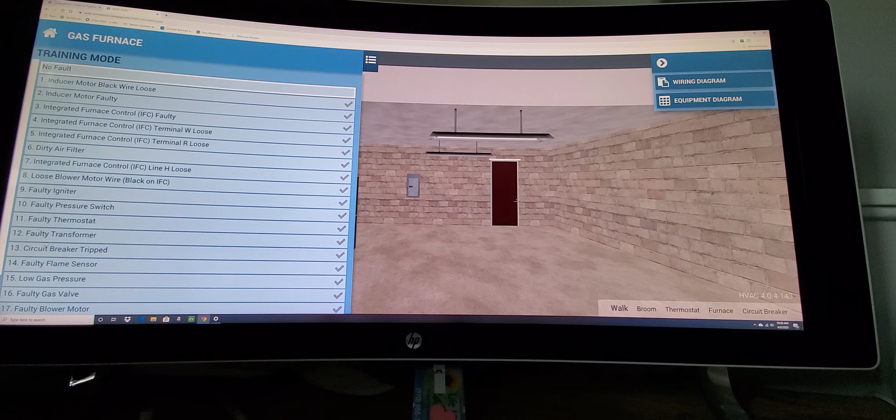There's a ton of different scenarios here, as you can see. You can go down each individual one. You can even start out with no fault, just get you familiar with the equipment. So you can come down, choose whatever one, do whatever you feel like. Let's try a faulty igniter.

So first thing first, your little cell phone here. Looks like an iPhone, I prefer Samsung. Tells you customer's name, street address, no heat call. It's gas-fired furnace without AC. This I haven't found to be useful yet. I don't know, I haven't really dug into it too far.

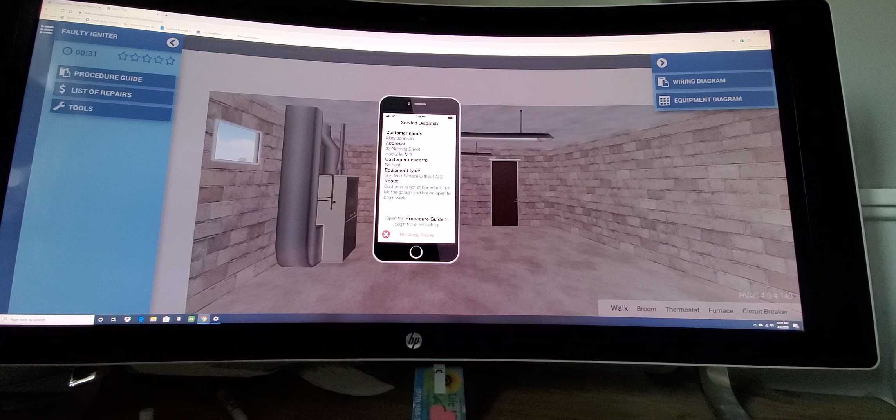So let's put away the phone. I always like to start with talking to the customer. I don't think you can do that on here, I haven't figured that part out yet. So then the next step would be look at the thermostat. Fan is on auto, the selector switch is on off. Let's flip that over here to heat.

Obviously it's on 90 degrees because we all know that everyone that's out there likes to push it up as far as it can go in the heating mode, or as down as it can go in the cooling mode, and expects that it's going to be super hot or super cold if they just keep adjusting the thermostat, and obviously that's not the case.

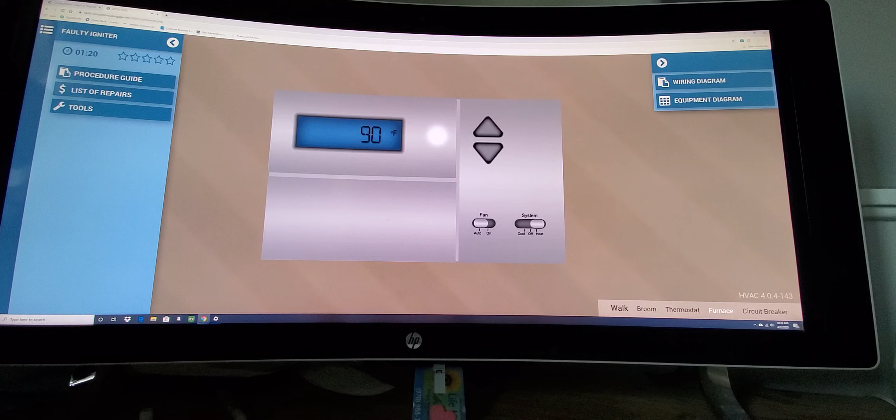So now let's go down to the furnace. You can hear the furnace working, I don't know if you can pick up the audio. So let's remove the door, you just simply click on it to remove the door. Cool part about this is it's trying to make it as close to real life furnaces as possible.

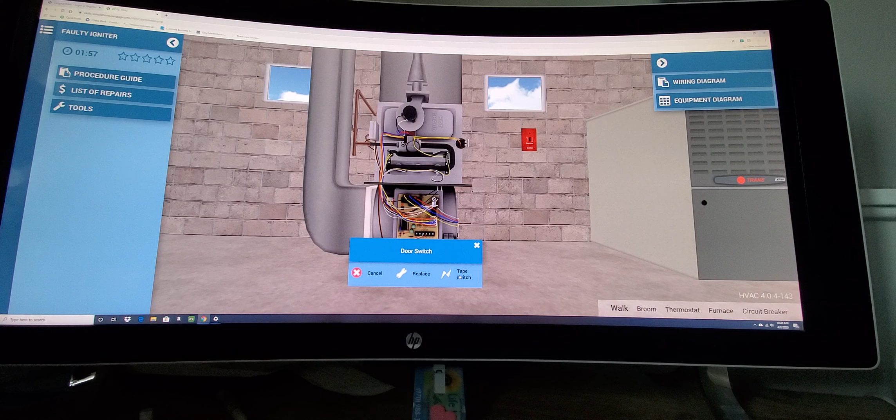So right in this area here, you see a door switch. You want to double click on that and say tape the door switch. Obviously we need to have it running. So normally you'd want to check your power and everything first, but you can see up here the blue rotating arrows, if you can't pick up the audio, is showing that the inducer motor is kicked on.

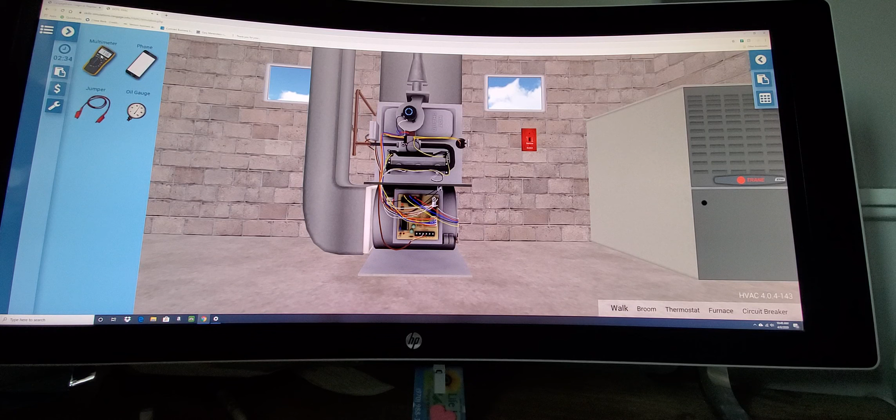So obviously that means there's a call for heat and there's no fire. So you can pull out your meter, and then of course it's a Fluke 116. If you click the red X, that puts your meter away.

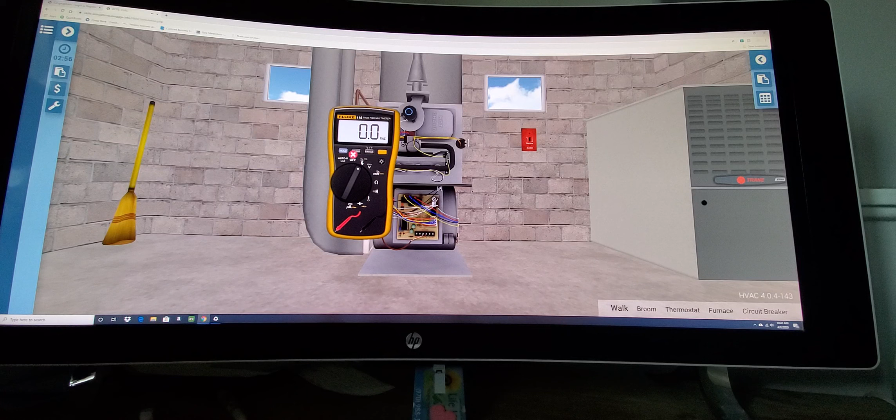You can just click on what you want to do with it, if you want to check ohms, continuity, voltage, whatever. I didn't see on this one where they have an amp clamp, but I did see that when I was playing around with the air conditioning. So in order to check voltage, you click on your red and black leads here. So let's click on the red.

Let's just, for shits and giggles, see if there is a call for heat. So we will put that on the W. Put the black on common, or red - if it's on red you should see no voltage. If it's on common you should see voltage, as we do. So we know there's a call for heat.

Inducer motor is obviously working, but once again, let's just check to see if there's power. And that's something else I forgot to say - it doesn't matter on here whether you put red to whatever and black to whatever, it will work the same. So we do have power to the inducer motor, but there's no flame.

I have not seen the igniter glow yet, so let's go down. Actually, let's check the pressure switch first. There is no power to the pressure switch, so that tells me that the pressure switch is closed.

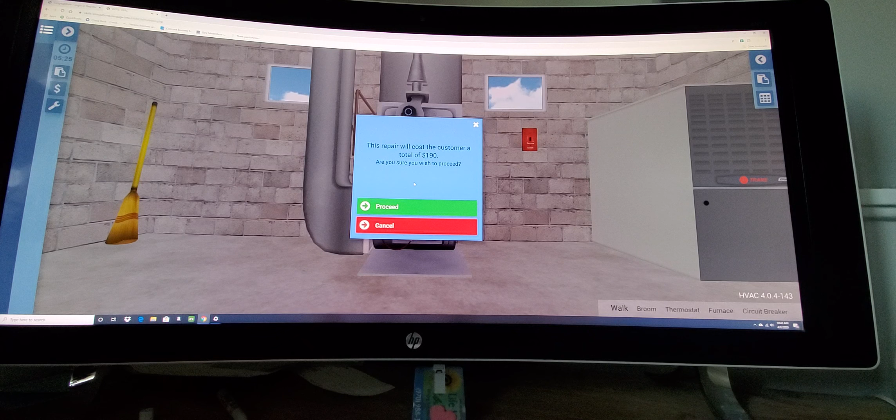In this scenario, we're just going to play with it a little bit and see what happens. Let's double click the igniter. It says cancel or replace. Hit replace, you're going to charge the customer $190. Obviously at our company we do not do that, but still, for this game, that's what it wants. Let's hit proceed.

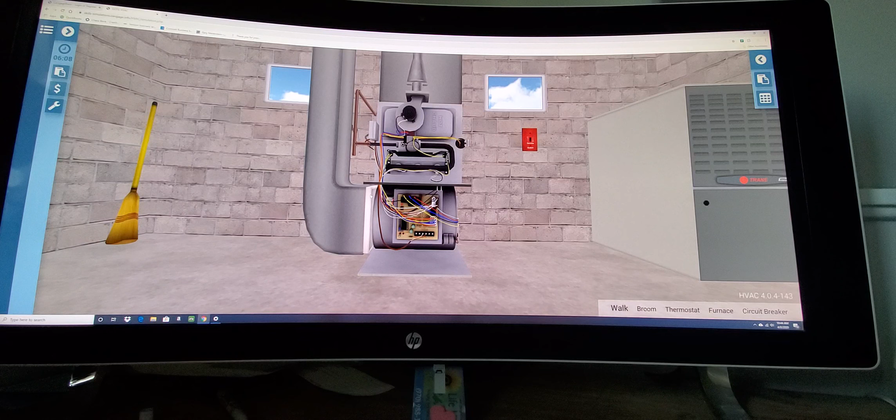Look at that, we got 4 out of 5 stars. We replaced the igniter. Click cancel, click cancel. So in order to get your 5th star, you must remove the tape. Remove tape. Close the door. Oh, can't do it on this.

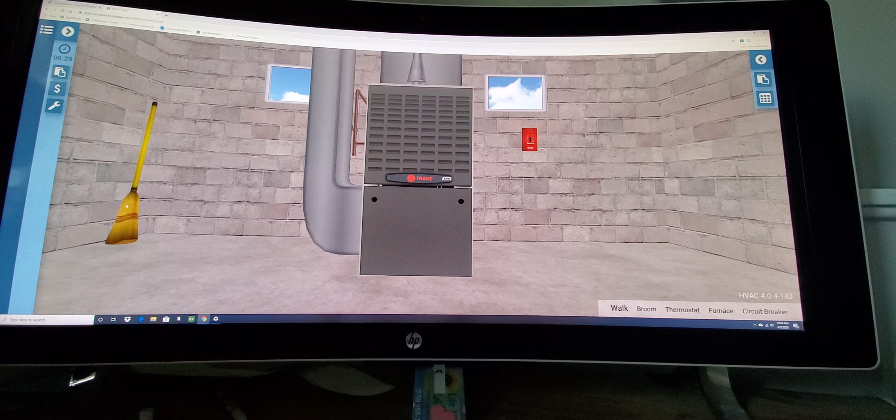Doesn't look dirty - I have seen YouTube videos where this shows it extremely filthy, so we'll just put it away so we don't have to overcharge the customer. Now let's replace the door. And one last thing to get your 5th star, grab the broom and clean up your workstation. Look at that, we got all 5 stars on the first shot.

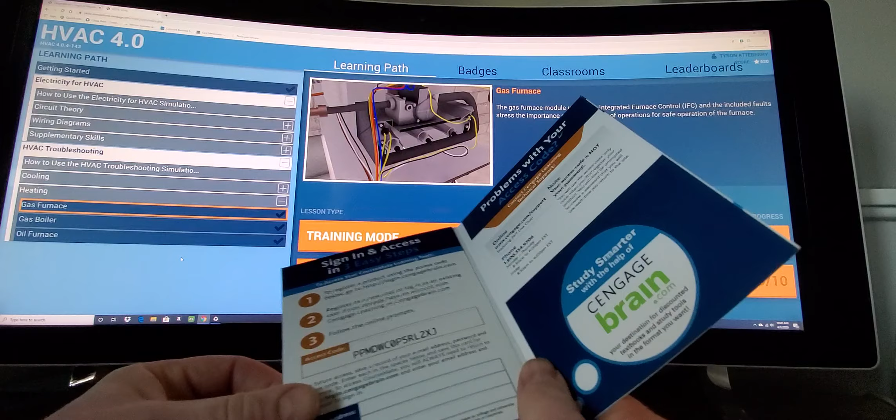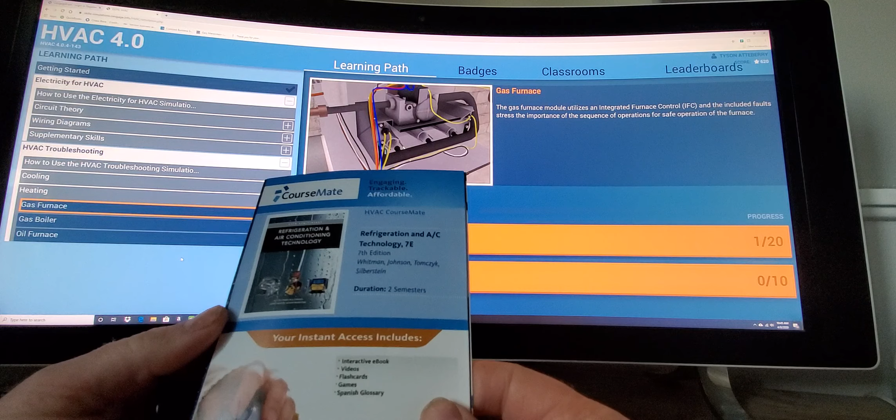I am going to play around with this and see what this is about, because it came with it. Don't exactly know, but it should help, it looks like, because it's talking about refrigeration and ACs, the 7th edition.